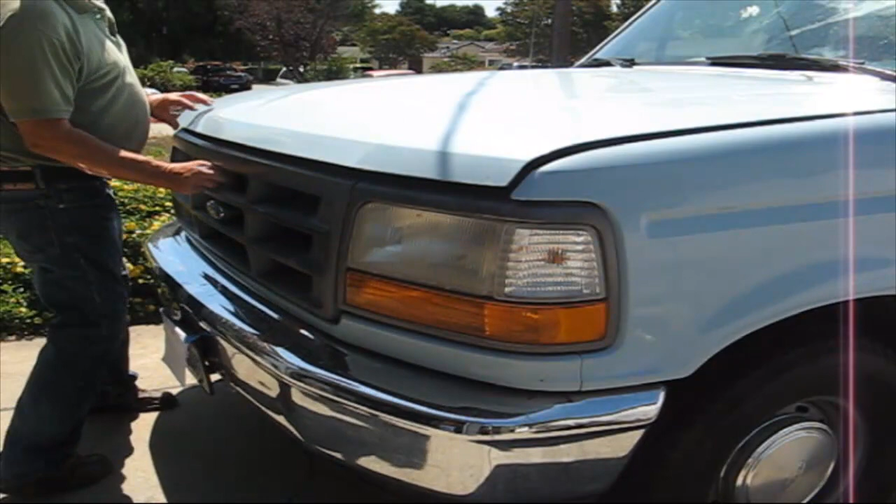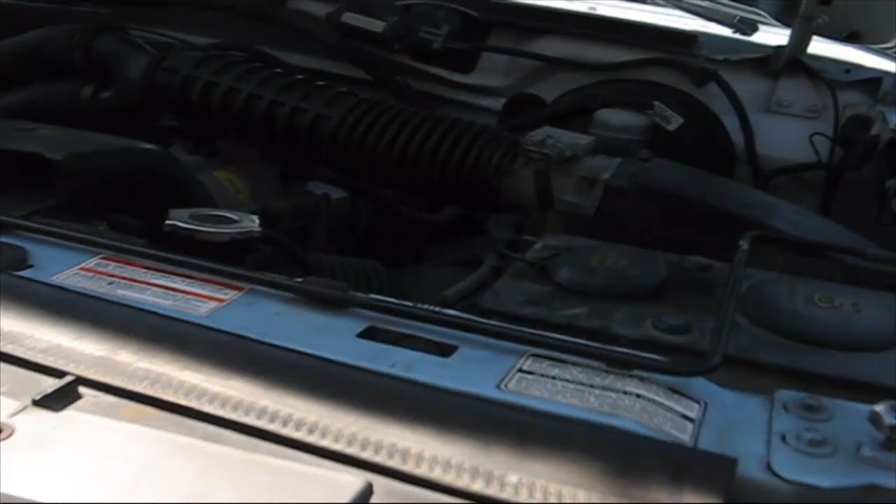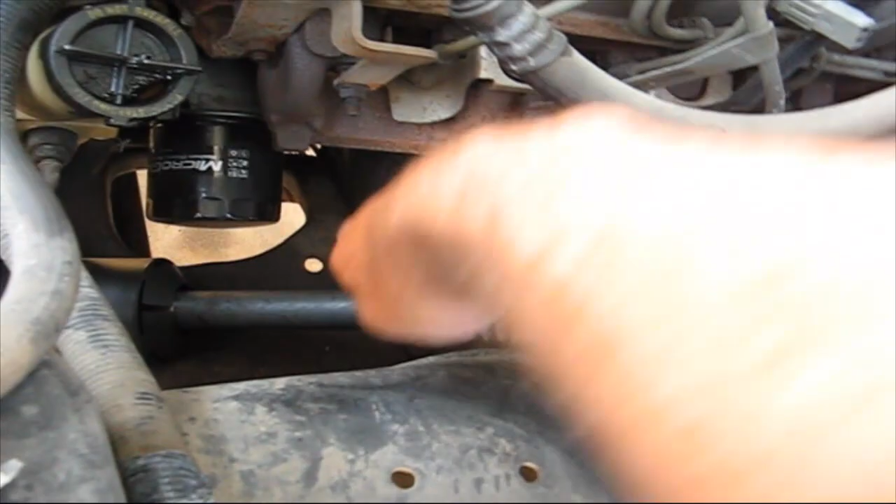Okay, and here is, if you look, here's the steering column shaft, and it goes down to right here. Here's the steering box. Okay, here's the power steering hoses. One's a high pressure, one's a low pressure. But here's what we're looking at, this bolt. And you see it has a little notch for a screwdriver.

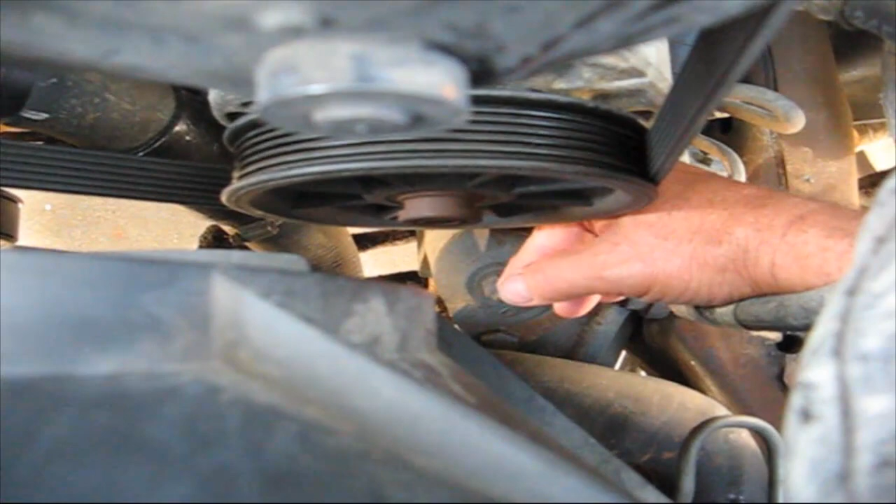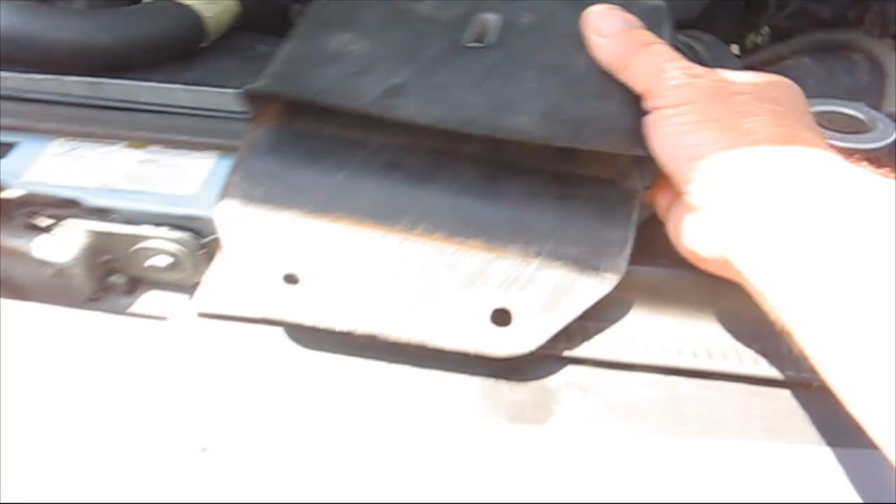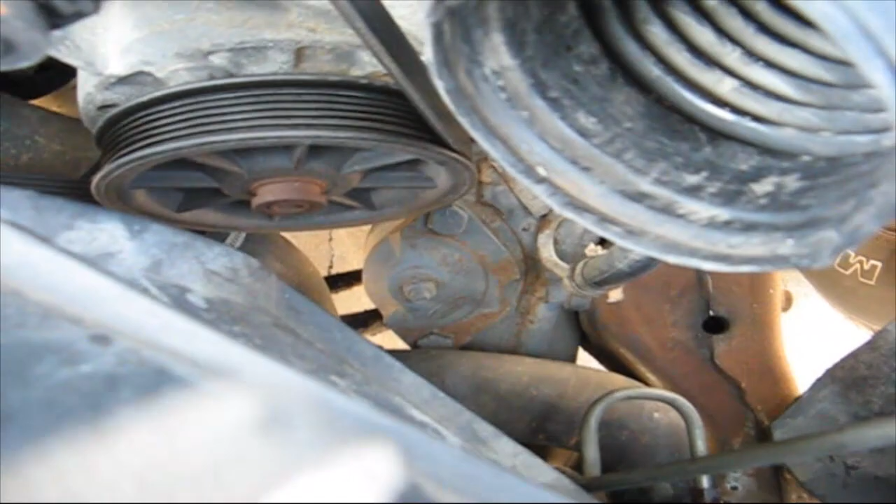So let me take this plastic thing off here. Okay, so I just took off this little air vent. It sucks the air into the air cleaner over here. But anyway, I just did that so I have better access. So here it is. Here's the notch. Here's the bolt. So let me loosen that up.

So here it is right here. This happens to be a Ford, but Chevy does the same thing. Everybody has the same thing. What I did is I just put a little yellow marker here, just so I know which way this is going. So, since I know this is a long reach, this is a 5/8 socket. So I'll use a ratchet with extension and break that loose. Oh, there it is. Okay, so we broke it loose.

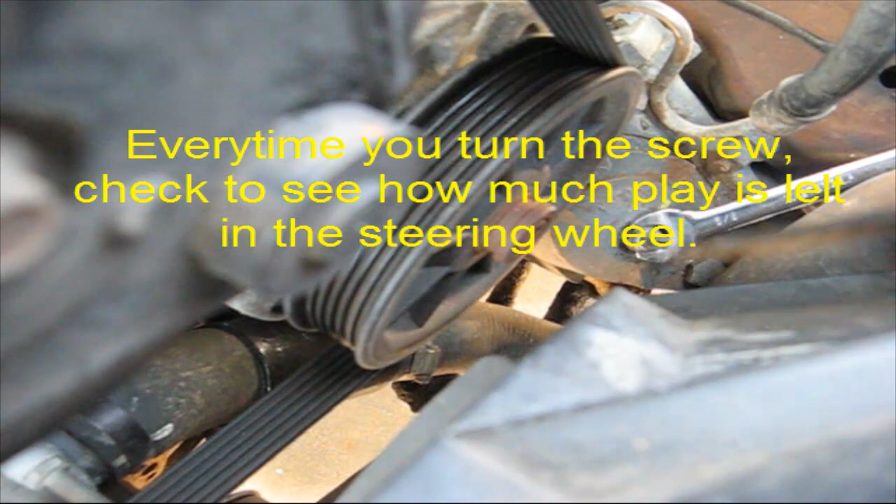Okay, so I have my wrench on there, and let me just give this a little bit of a turn. Now I want to check the steering to see if it tightened it up. Okay, it needs to go just a touch more. Maybe adjust a little bit. No, I just do it a little and check it, a little and check it. There. That is a full half turn. Okay, that is all we want to do. So, just going to tighten this up.

Okay, I have my 5/8 socket on there, and I just give it a little turn, tighten it up, and there it is. That's all you do. Don't turn it too much. It doesn't need a lot. So now I come back to the steering wheel, and it's tightened up quite a bit. So we're just going to leave it like that.

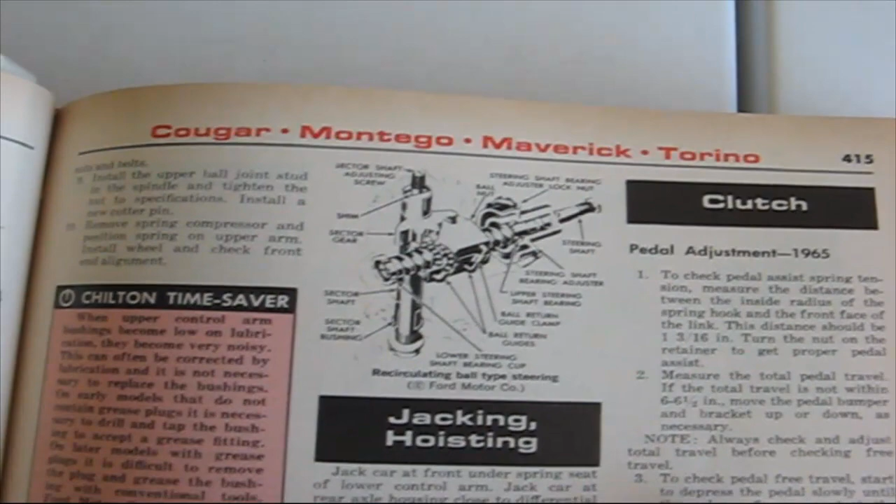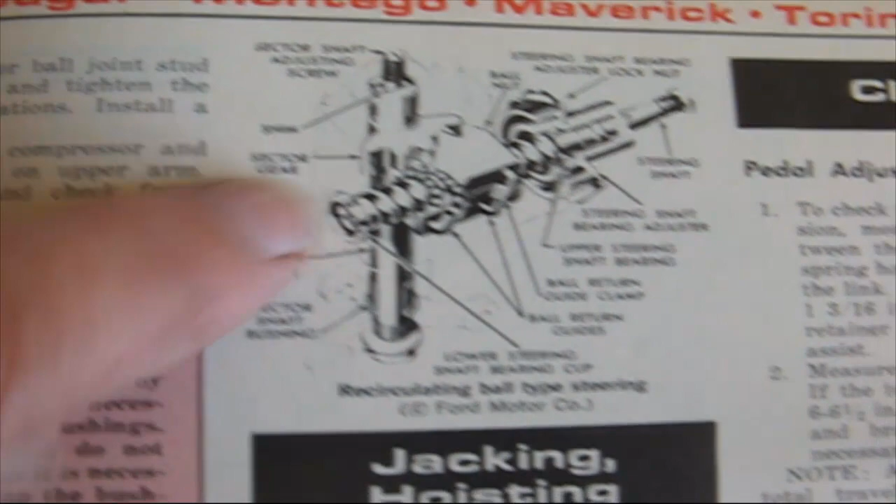See, and here's inside the manual for Ford. Once again, it tells you that's an adjusting screw. And you just tighten it up to tighten the mechanism up. So it's not hard, it's the same for most vehicles.

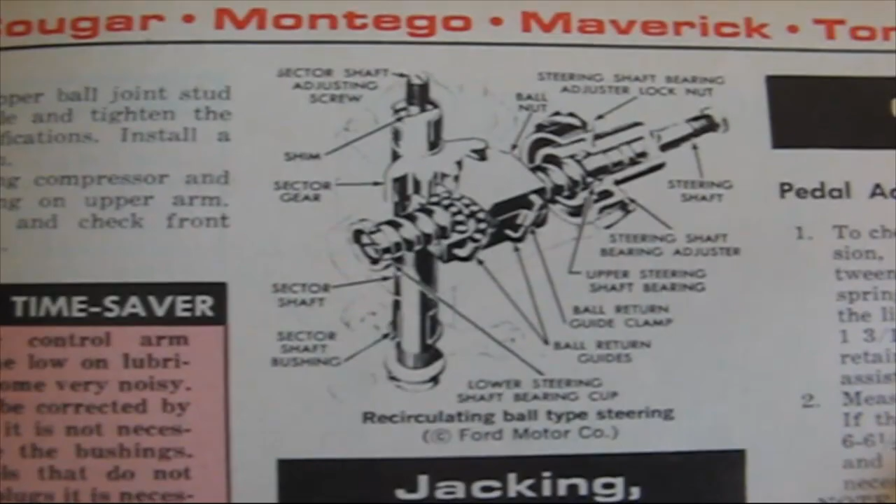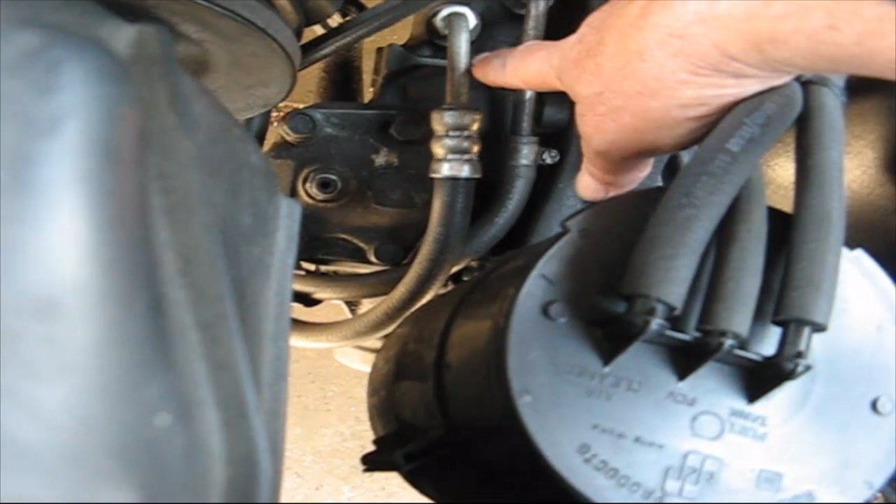Alright, here's the same thing again. This happens to be a '70 Chevelle, and here's the steering box itself. Here's the high and low pressure, and here it is. Here's the nut. This one just has an Allen screw on it. It's the same thing. You just loosen this up, tighten this down a little bit, hold the Allen wrench, and just tighten it back up.

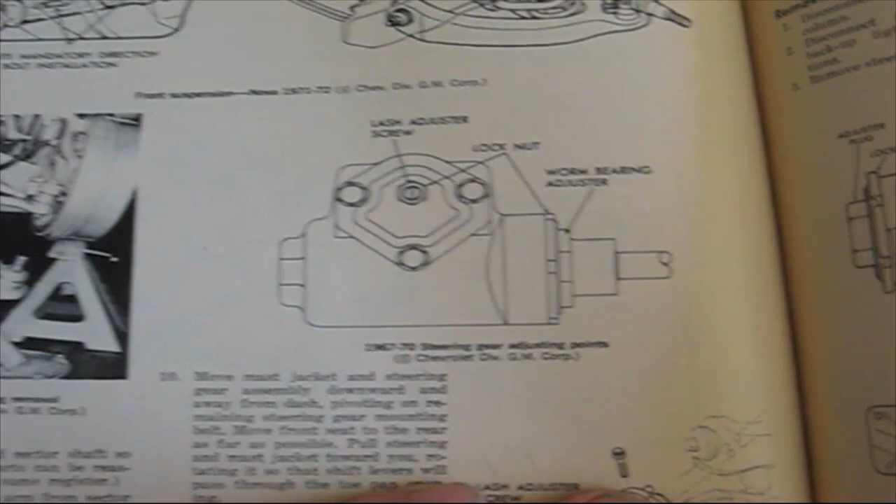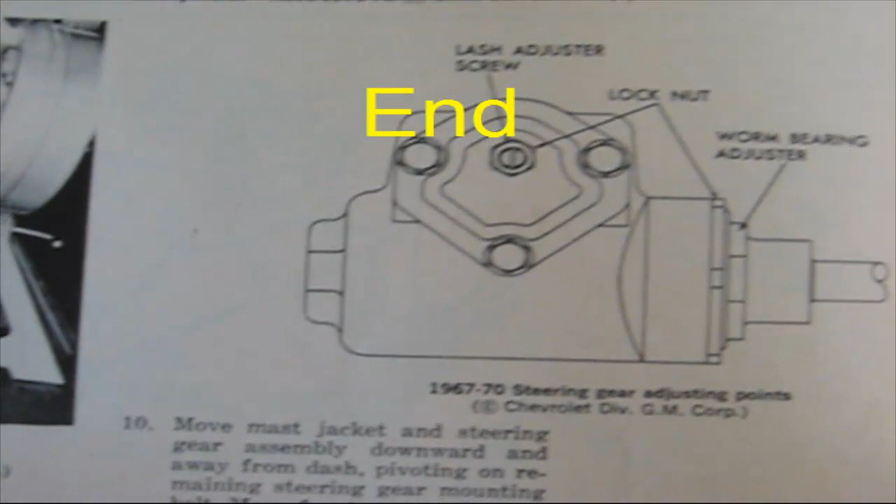Alright, just to show you that you've seen one, you've seen them all. This one is from a Chevy, and it shows you right here. Here's the lock nut and the adjuster. So all you have to do is loosen that and tighten it up a little bit until the steering is not loose.